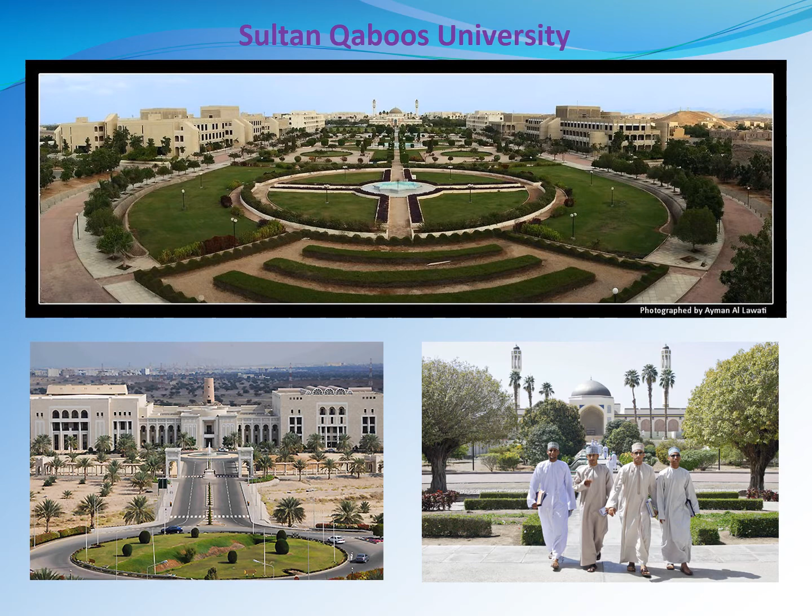Now, before the actual topic, I would like to start with a quote by A.R. Dykes. Engineering is the art of modeling materials we do not wholly understand into shapes we cannot precisely analyze so as to withstand forces we cannot properly assess in such a way that the public has no reason to suspect the extent of our ignorance. So that last part is a bit of levity, but that is what we actually do when we are doing some cutting edge research at the very frontiers of technology or science. There are things which we really know and there are things which we do not.

What was the motivation behind the current work and what is its significance? Swelling elastomers in oil and gas drilling. Swelling elastomers are a very recent development in the world of advanced polymers. They undergo dynamic swelling when exposed to water or oil or acid. And they have been successfully used as packers, swell packers, and other sealing elements in various oil fields. A swell packer is something that consists of a swellable elastomer section or sections bonded to petroleum pipes, which we call tubulars.

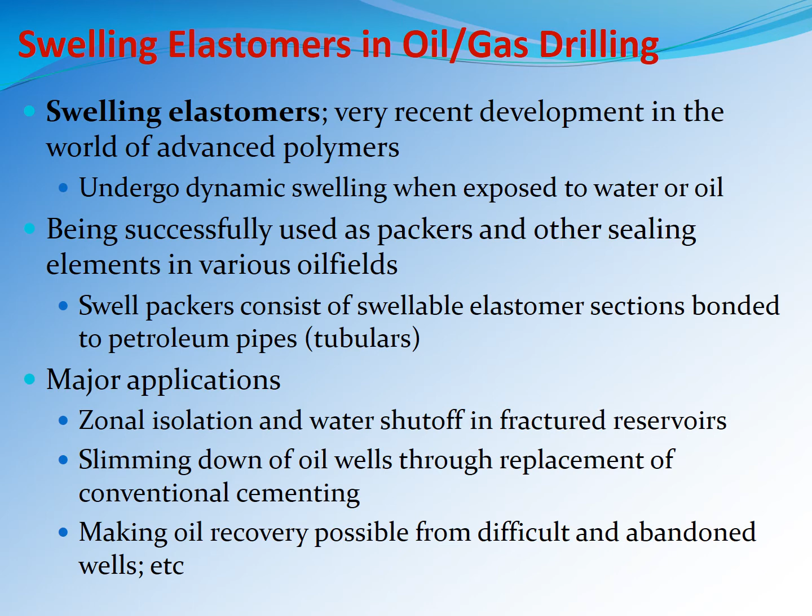Major applications: zonal isolation, shut-off, slimming down of oil wells, making oil recovery possible from difficult and abandoned wells, etc. So these swelling elastomers and swell packers are really doing a lot of new jobs which people thought could not be done, and they were abandoning wells, and now they think they can extract oil again from those wells.

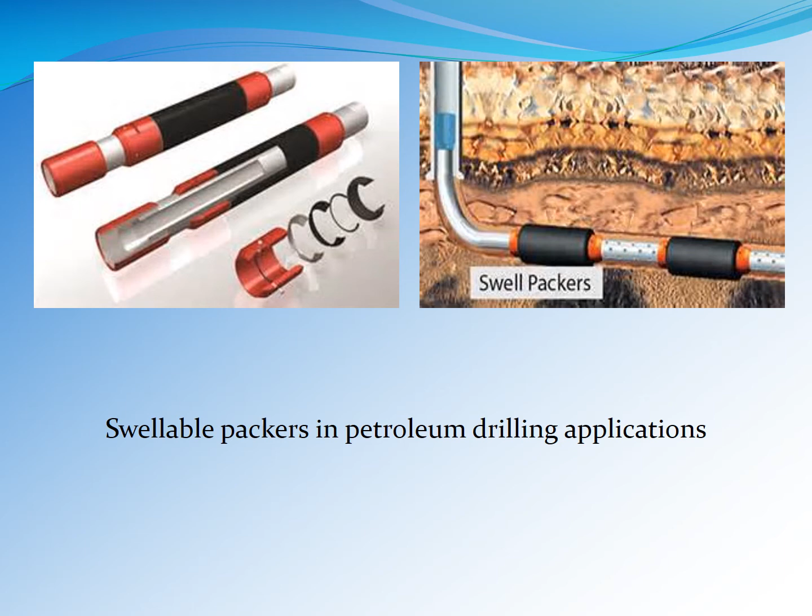So I'm showing you just a few pictures. This is a swell packer. This is a cutaway section, the rings and so on. In a horizontal well, they do vertical drilling and then they do it horizontally. So this is a swell packer, this is a swell packer. This is a perforated petroleum tubular from where the oil will be going up from the reservoir.

There are lots of issues here when we do this type of modeling and simulation or experimental work. Environmental conditions can be different. There could be oil there, or water of different salinities, or acid of different concentrations. The temperature could vary as we go down into the earth.

The properties of the formation or the rock would be changed, and the differential pressure of the oil around the swell packer would be different. So this rubber will start to swell, right? Day 1, day 3. After some time, it will swell and completely fill up the space,

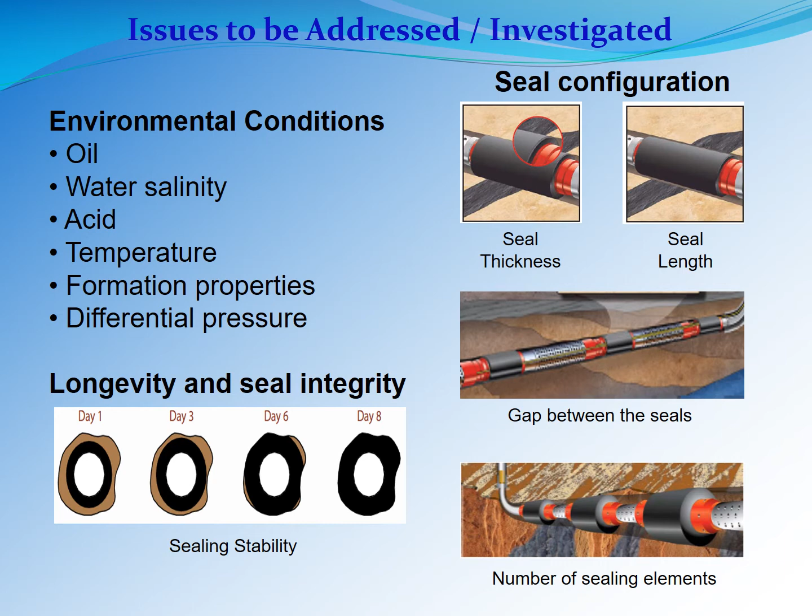and it will be sealed completely. Other variables: the seal thickness can change, the length of the sealing element can change, the gap between the elements. This is one packer, this is the other, this is the other. So what will be the gap? The number of sealing elements. So when we do these experimental investigations and numerical simulations and so on, there are lots of very challenging parameters that we have to model to create the real scenario.

Elastomer research at Sultan Qaboos University, right? We have done several research or service projects on the theme of performance analysis of elastomer seals in oil and gas wells, with Petroleum Development Oman, which is the main company in the country, and other companies in the Gulf region: Petroleum Development Oman, Shell Oil and Gas, Baker Hughes, Maersk Oil Qatar, Ruma Rubbers Holland, Swellfix Tendeka. We have agreements with lots of these companies, non-disclosure agreements and so on, to perform certain research or service projects with them.

The major goal, as I said, is performance evaluation and design improvement of water swelling or oil swelling elastomer seals and swell packers in downhole petroleum applications. The methods and techniques: modeling and simulation, analytical modeling, numerical modeling, mostly finite element based, some statistical stochastic modeling, experimental investigation for performance evaluation, material characterization of the rubbers and so on. So lots of different types of studies have to go hand in hand.

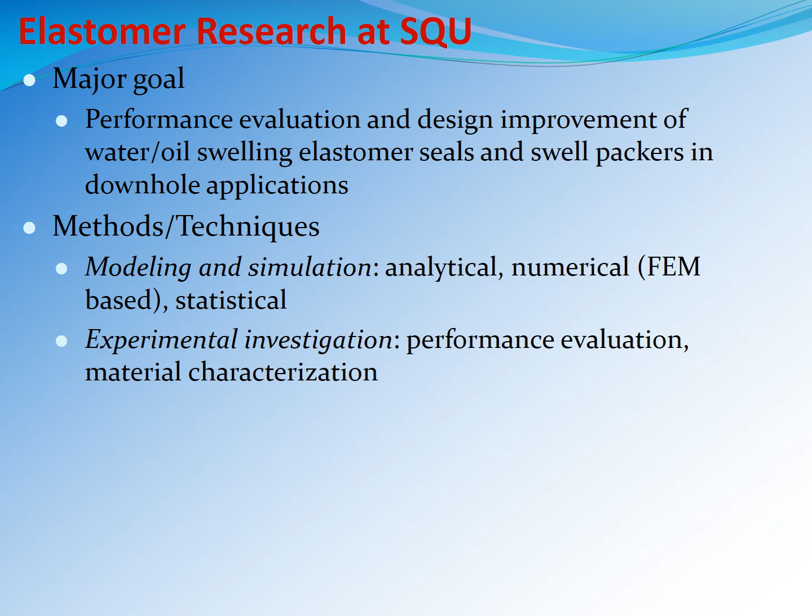The target benefits of this type of research: pre-qualification or proper selection of suitable elastomer materials and packers for a given set of field conditions. Some packers are good in one type of oil well, some other packers would be better in another type. So if we can select the proper ones before we use them, the chances of success really increase. Improvement of sealing or packer design, evaluation of seal integrity, will the seal last for a long time, and of course modeling and simulation of swelling elastomer applications in different kinds of actual oil and gas drilling situations.

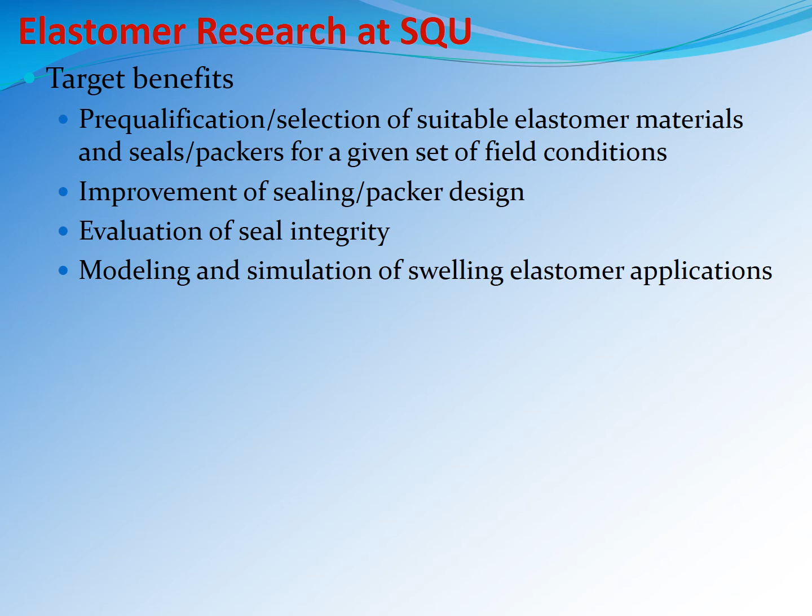The types of studies that we have done: performance testing, reliability testing, numerical modeling, analytical modeling, material modeling, and so on.

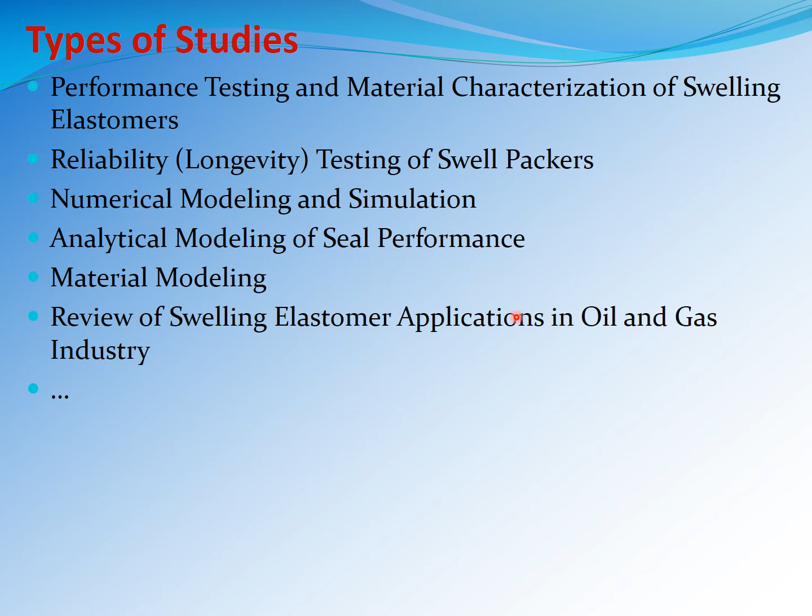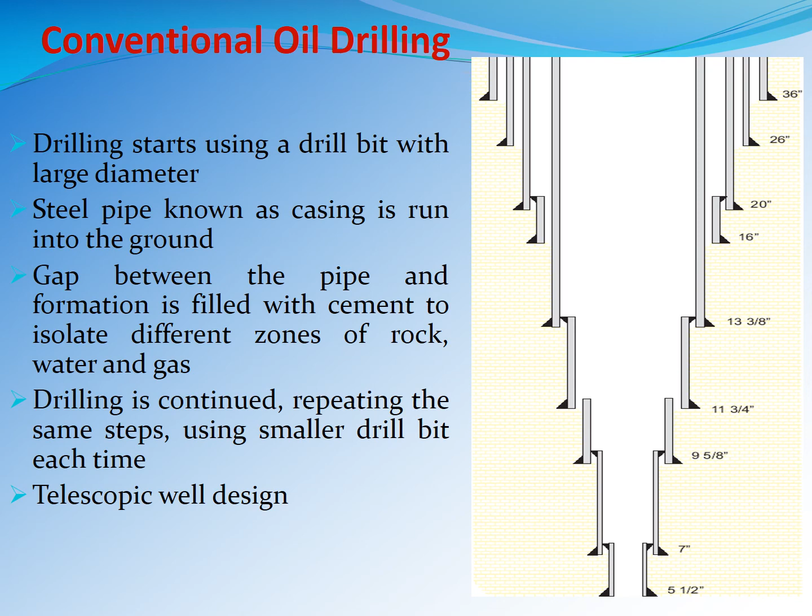They are now trying slim well design: rather than starting with a very large diameter and going to small, can we have almost the same diameter throughout? This is called a slim well design, and it has been made possible by solid expandable tubular technology. And SET technology always works together with elastomer seals.

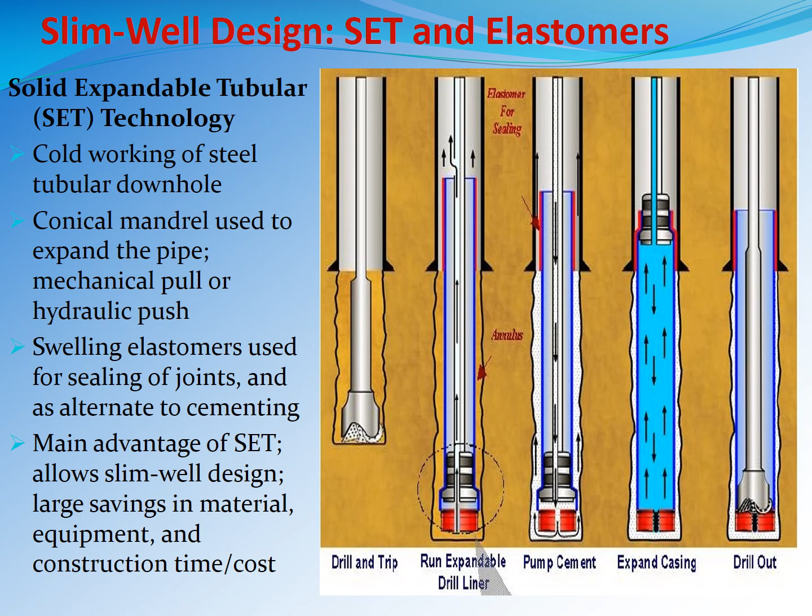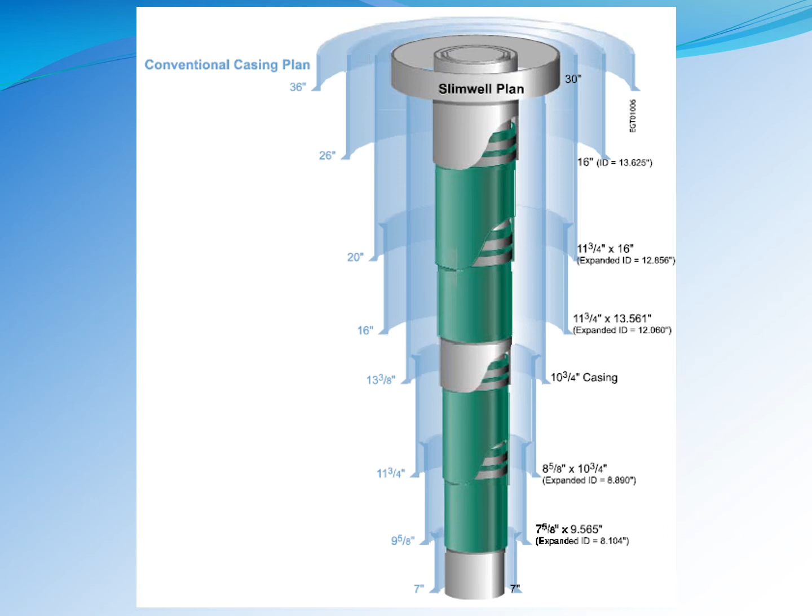So I am just showing you a conventional plan and a slim well plan, right? The conventional plan starts with this very big hole and comes to this. The slim well plan starts much smaller and goes like that. So there are huge savings in drilling, mud removal, water, steel and all other resources.

Water shutoff or zonal isolation. Water shutoff: in some places, oil is there, but suppose they detect a water producing zone. So now if this water goes inside with the oil, then the oil that comes in is mixed with water, and this is absolutely not acceptable.

So in this zone where they have detected water, they will set this swelling elastomer, and once it hits water, it will swell and it will seal off all this zone. So the water will now not do any incursions into the oil zone. This is called water shutoff.

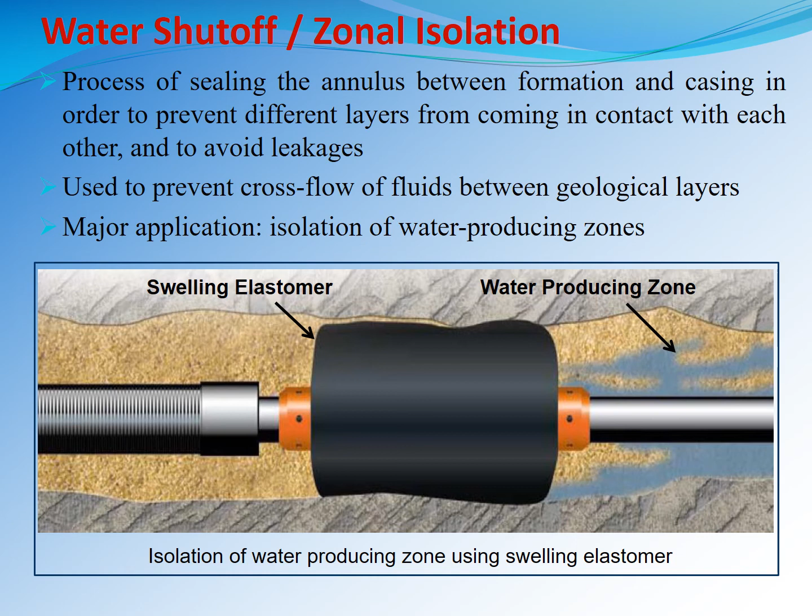Similarly, if there is oil of one kind, one viscosity, and another viscosity oil is trying to mix up and they detect it, then they would send these elastomer packers to shut off the other producing zone. So in case of water, it is called water shutoff. In case of other types of isolation, it is called zonal isolation. So these are major uses of these things. Other pictures for the same thing.

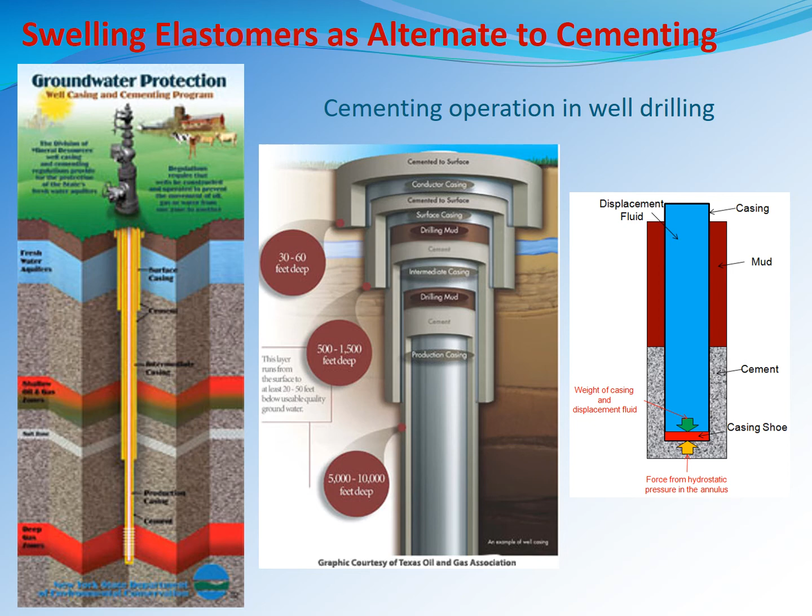Also, as I was mentioning, cementing is done. Now we can remove some cementing, and instead of the cements, we can use swelling elastomer packers. So this is another major use where we can reduce cost and time and so on. And these are other pictures and so on. We can go back to this later on if somebody is interested.

So with that background of what swelling elastomers are and how they are used in petroleum drilling and so on, what are we doing at Sultan Qaboos University in terms of elastomer testing, characterization and so on?

Before we go there, Henri Poincaré, major scientist: just as houses are made of stones, so is science made of facts. But a pile of stones is not a house, and a collection of facts is not necessarily science. We do a lot of experimental work, and this is very true for us. First of all, it is very difficult to design the experimental facilities and to perform all the tests. But at the end, if you have a lot of results, then unless you can join all those results in scientific reasoning, these are a pile of stones.

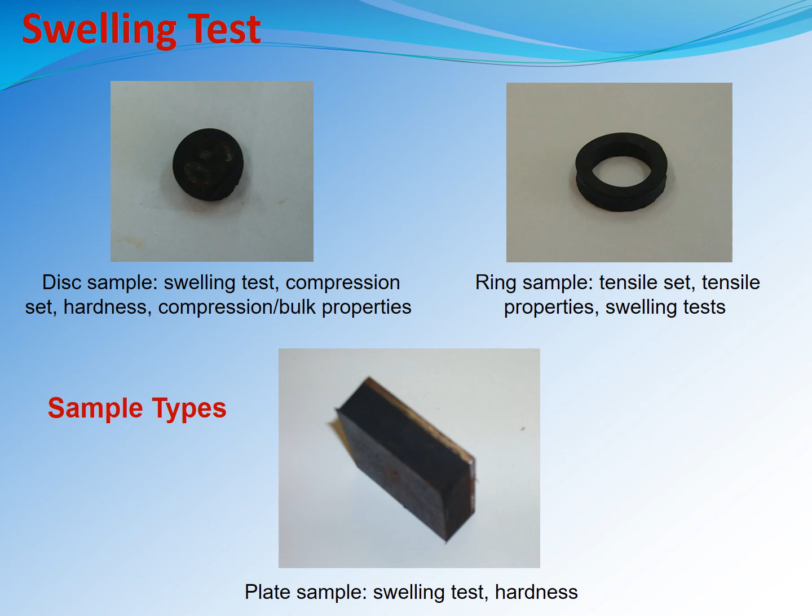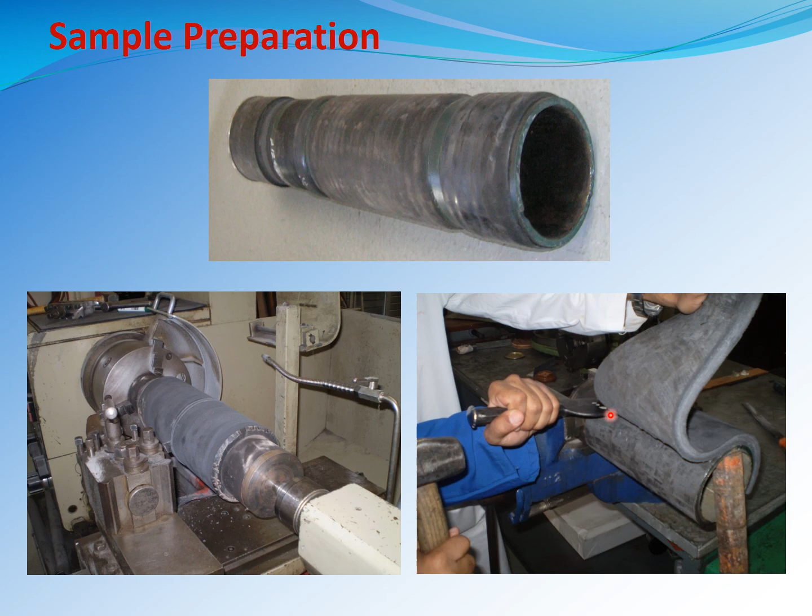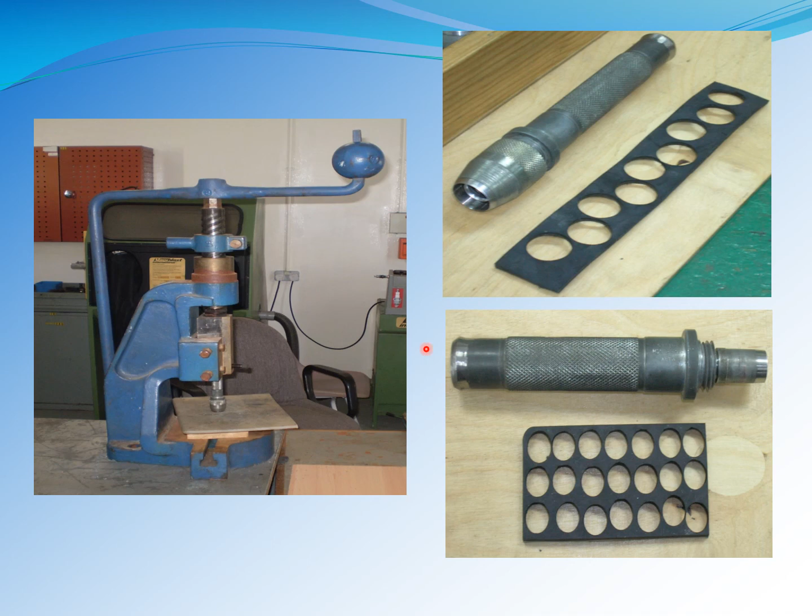So in the swelling test, we have to make some disc samples, some ring samples, some plate samples. We start by taking a swell packer from the oil industry, remove the rubber from it, do some surface grinding on the rubber, make special jigs and so on, so that the glue area is gone. Cut the rubber into different pieces, grind it, use these punch and die systems to make the discs and the rings and so on. So before you start, you have to do a lot of things.

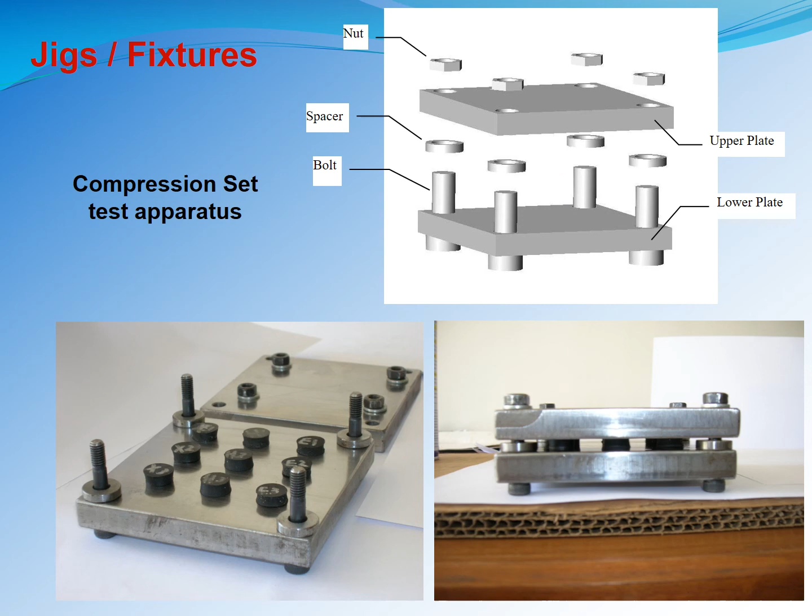There are tests which are called compression set tests. So in accordance with ASTM and ISO guidelines, we designed and manufactured our in-house jigs and fixtures to do the compression set tests. There are tests which are called tensile set. So again, with ISO and ASTM guidelines, we designed and fabricated our own jigs and fixtures to carry out these tests.

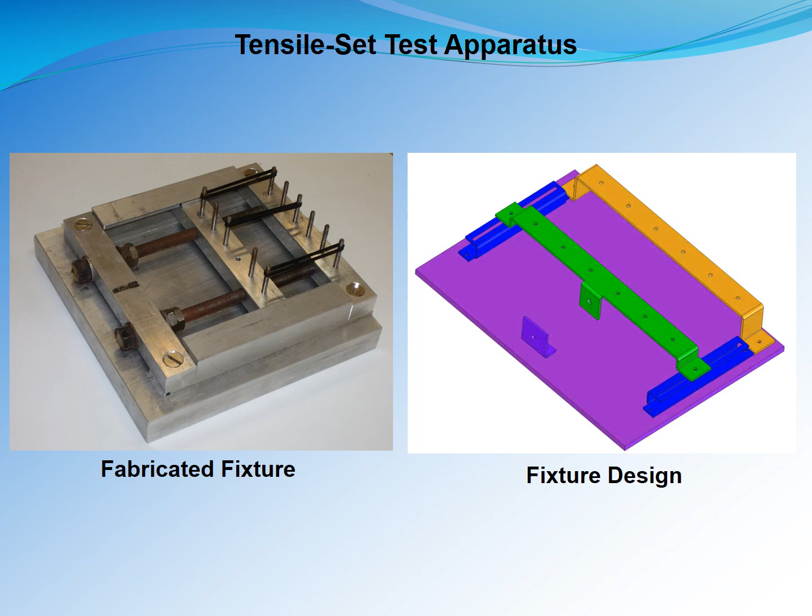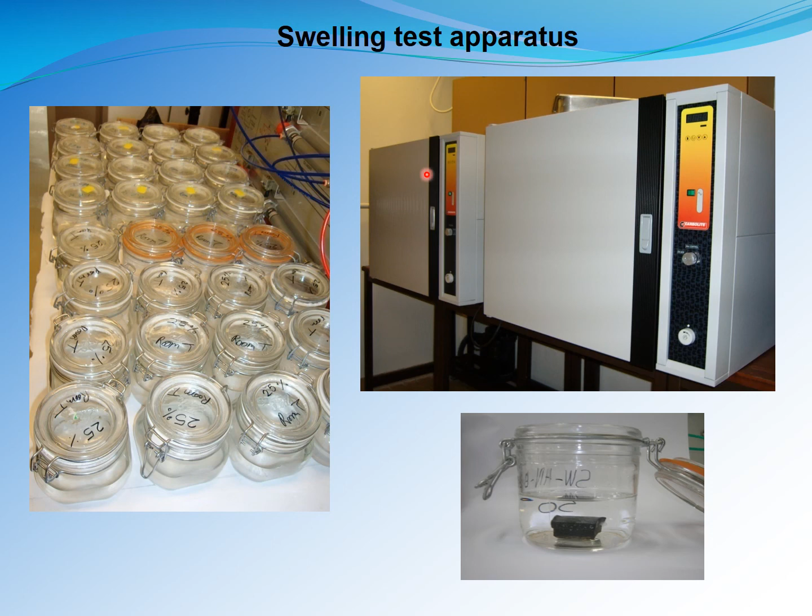There are swelling tests. We have to swell the rubbers in different kinds of oils and waters and so on, and keep the salinity for a long time. So we have to have a lot of sealable glass jars and servo controlled big ovens and so on for the swelling experiments. In swelling experiments, we measure different things, their weight and density, and especially we constructed this equipment to measure the volume by displacement method.